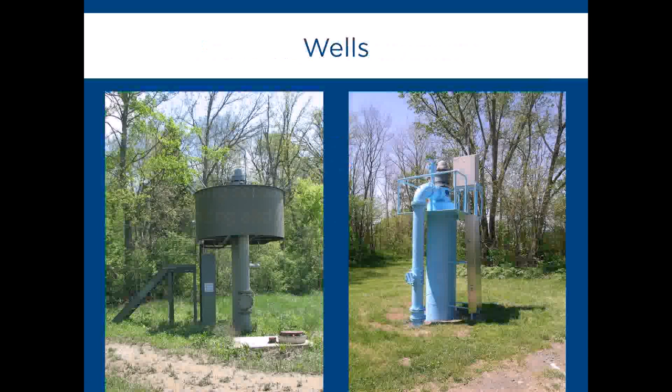The clay layer is important with contamination or spills or any activities that happen on the land surface that could impact the soil. If there's a clay layer of soil between the surface and the aquifer, then that helps act as a barrier. And in those situations, you would have a confined aquifer where it's isolated from the surface. And then there may be other situations where there's an unconfined aquifer where the water is more susceptible to surface contamination.

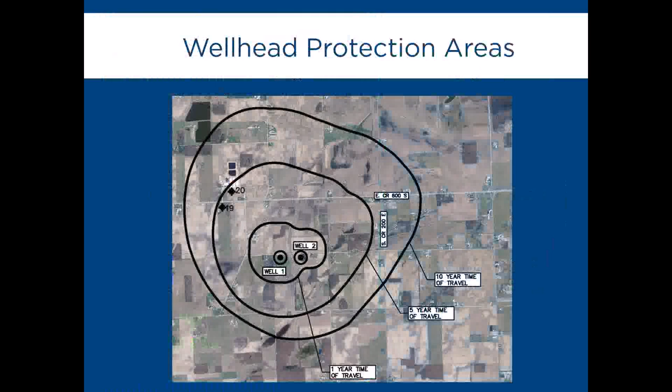So let's talk about the importance of groundwater protection. As I mentioned, the activities that happen on the land surface can impact the ground and then the water and the soil underneath. So if there are impacts to the groundwater or the soil, it can migrate down into your groundwater. So the 1-year, 5-year, and 10-year times of travel are important areas to focus on with your

wellhead protection efforts. The 1-year time of travel represents if a point of contamination lands within that area, it would take 1 year to travel to the wells, and then the same with the 5-year and the 10-year. So your wellhead protection planning is kind of looking at either a 5-year or a 10-year scope as to how you're going to be managing those areas and how quickly contamination might travel to your wells.

Any small amount of contamination can have a big impact on a drinking water source and can make it unsafe. So treatment can also be very difficult once an underground aquifer is contaminated. So it's important to protect the groundwater source so that you don't have to deal with public health issues.

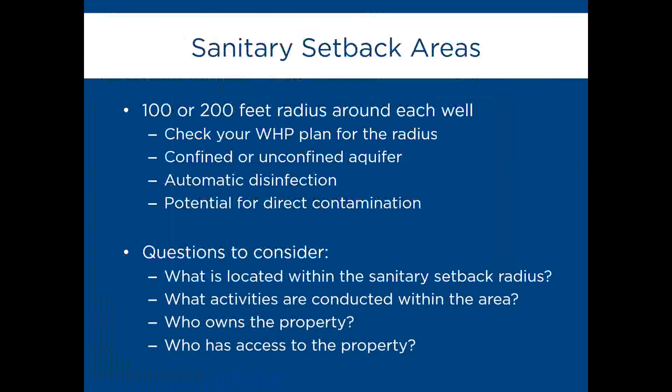Who owns the property? Sometimes wells are placed on properties that are not owned by the utility. And what are the challenges in trying to deal with different property owners? And then who has access to the property? All of your wells need to be secure from unauthorized access. So that's another issue to think about around your wells.

So let's first talk about chemical usage within the setback area. All chemicals need to be restricted. So no chemicals should be used, applied, mixed, stored, or transported within your sanitary setback area. Now you can use the chemicals that are used for water treatment. In many cases you do have water treatment chemicals near your wells.

So that's appropriate. But thinking about some of the other chemicals, are you using chemicals? Are you applying fertilizers or pesticides, doing any kind of mixing, any storage, or the transported could be transferring a chemical from one container to another. All of these kinds of things should not be done within 100 or 200 feet of your wells.

If you do have anyone doing lawn maintenance in the area, make sure that they are educated on the refueling or repair of any of that equipment. If there's a mower or a weed eater that needs refueling, it should be taken outside of the sanitary setback to transfer fuel into those pieces of equipment. Just because of the likelihood of having a spill, you want to kind of eliminate that issue.

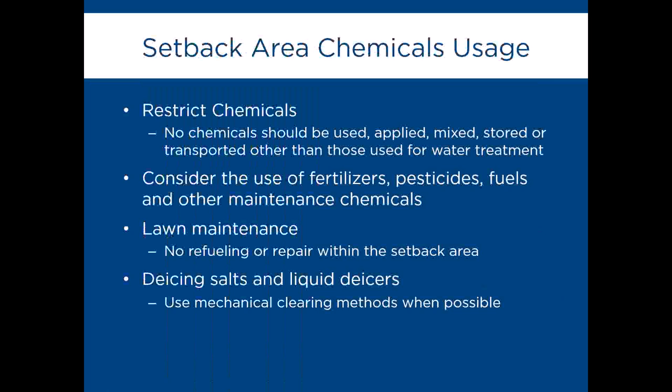And then something else to think about is de-icing. Usually there's an access road to your well, or there may even be some sort of a road next to your well that in the winter you need to do some sort of de-icing with salts or liquid de-icers. If you can use mechanical clearing methods, that is the best option. Obviously, you want to take into consideration the safety issues with ice and try to maybe apply lightly if not at all. But do your best to try to control those types of situations.

So, preventing and cleaning up spills within your sanitary setback. If you're going out to your wells to check on the wells, you're likely taking a utility vehicle, and you want to make sure that those vehicles are not leaking. So check those vehicles periodically, make sure they're not leaking. If you do have a leaking vehicle, don't take it near your wells. Don't park it near your wells.

Any of the equipment that's located near your wells, make sure that that is not leaking. If there are leaks, you should place drip pans under the leaks to catch the spills, or an absorbent spill pad might be useful to help collect those spills. You should always clean up spills with dry methods. So absorbing a spill or using oil dry, the granular absorbent, is a good option. You should never spray a spill with water to try to wash it off.

And if you do have a spill that's puddling, sometimes a boom can be used. They have absorbent booms that can provide a barrier to help control a spill and prevent it from moving. You also never want to allow a spill to soak into the ground, especially in your sanitary setback area. That is the major issue. So if you do have soil impacts, you want to make sure and dig up the soil, and if you have a gravel surface where a spill has occurred, the rock that has been spilled on needs to be removed and taken out, just so that spilled material does not migrate down into the ground.

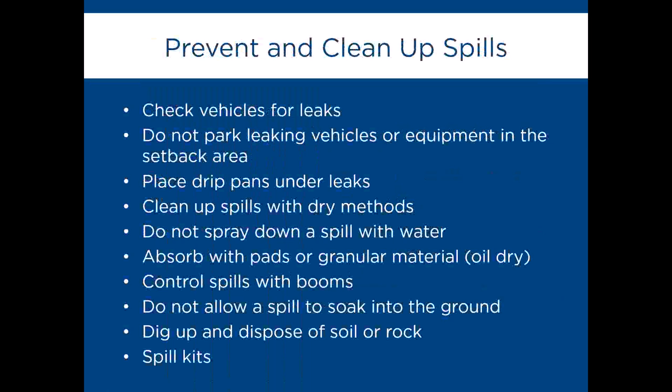One option that you may consider is having a spill kit on hand, maybe in your vehicle, or if you have a well house or some sort of a water treatment plant near your well, some sort of a structure where you can keep a spill kit so that it's on hand to address spills as they happen.

So then let's talk about drainage within your setback area. You should do periodic inspections of your setback areas to look for the drainage patterns. The drainage in your setback area should always flow away from your wells. This is where a spill would flow. So if there is a spill, you want it flowing away from your wells and not towards your wells. A good way to check on this is during a rain event. When it's raining, go out to your wells and take a look at where the water is flowing. And this gives you a good idea of where stormwater might be ponding or where it might be flowing.

You should also check the adjacent properties, the properties that are around the wells, to check for on-flow. So the drainage from another property might be coming towards your wells. And if you can redirect those flows or route them around your wells so that they're not flowing towards, that is the best situation. You should always inspect after a rain event to look where the water is ponding. If there's ponding water, that's not a good situation. You want to try to regrade those areas so that those little pockets of ponding water don't sit, because then they'll eventually soak into the ground.

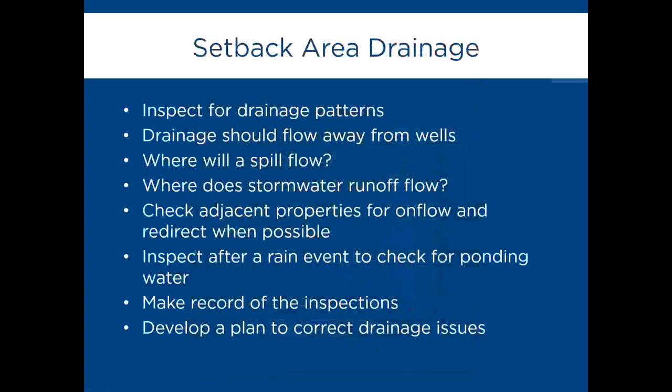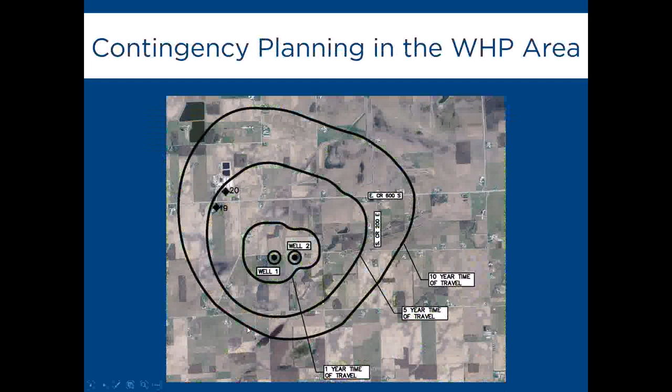So going back to our wellhead protection area, we now want to talk about contingency planning. So in the event that there is a spill or some sort of contamination, what are the steps that we need to take to address those issues? So thinking about this wellhead protection area and what are the steps that we need to take.

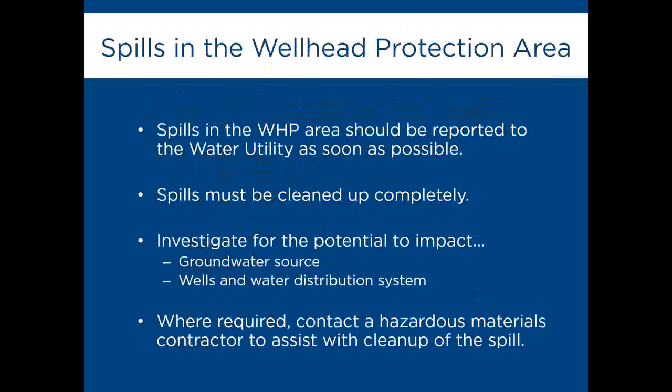So now we're going to talk about those emergency scenarios. And as we go through these, I wanted to just have you think about what it is that you would be doing in the event that you had one of these scenarios. So the first one is a power outage, then a mechanical failure, a distribution system leak or failure, a fire, explosion or a natural disaster, and then a spill. And every situation is a little bit different, so just think about these in general.

So if there was a power outage at your well, if you go to your well and you notice that the power is out, you want to notify your supervisor and then check for an alternate power source, or maybe an emergency generator needs to be turned on. You want to monitor your wells to make sure that they're working properly, and then turn to additional wells.

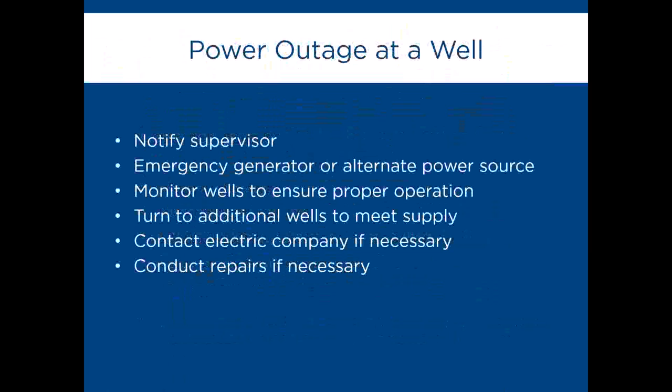If there is a well that cannot be used, is there another well that can be turned on to help meet the supply? The electric company might need to be contacted if it's a situation associated with their utility, and then conduct the repairs if necessary and get your well back in service.

A mechanical failure at your well. So this might be a pump that has gone out. You want to notify your supervisor and then check for leaks and try to control those leaks. Remember the sanitary setback area. You want to clean up those leaks immediately.

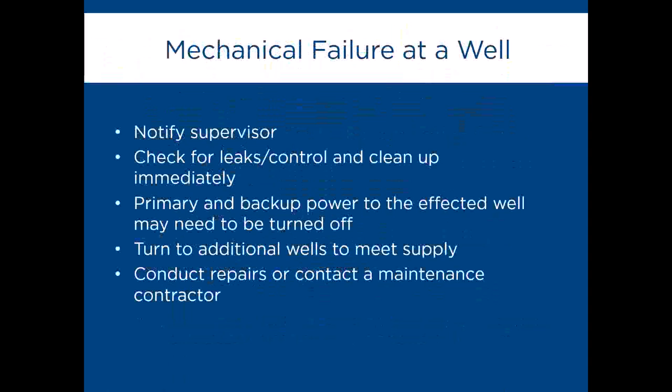So you want to also look for backup power. That may be the reason for the failure. You may need to turn that off, the backup power. You may also need to turn to additional wells if you have a well that's down completely and it needs to be repaired. So conduct your repairs and then contact a maintenance contractor if necessary to help with that.

When you have a leak or a failure in your distribution system, you want to notify your supervisor and then close off appropriate valves to try to isolate the problem. You might turn off an affected well if necessary and then start to conduct your repairs. When you are doing the repair, be aware of spill prevention during that time.

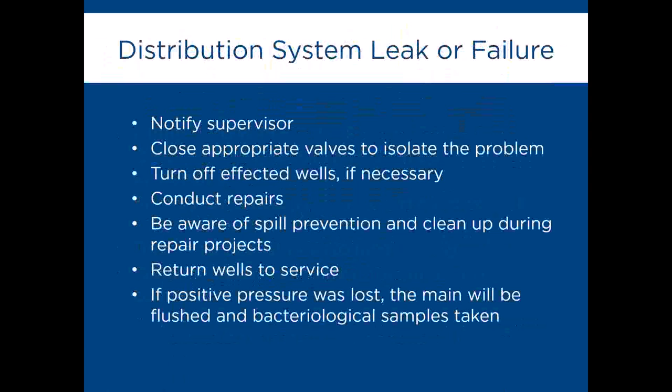If you've brought in equipment to help with a repair, you want to clean up any kind of a spill that happens during that time. And then you want to return your wells to service and get your system going again. If you did lose positive pressure, the main would need to be flushed and bacteriological samples would need to be taken.

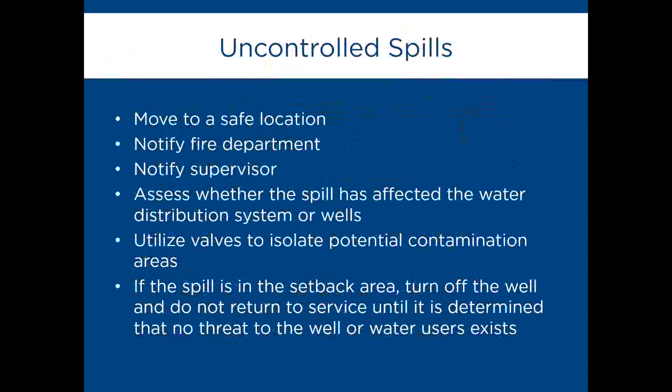And then if the spill is within your setback area, you want to turn off the wells so that the well doesn't start to pump some of that contamination directly into your wells. And do not return the well to service until it's determined that that spill has been completely cleaned up and that the threat to the water system has been eliminated.

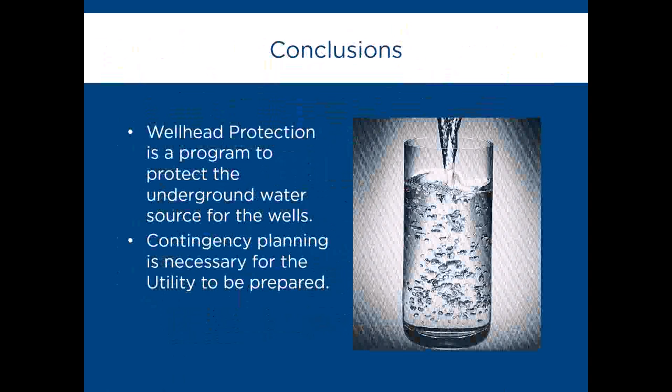So in conclusion, I just wanted to wrap up and talk about the importance of wellhead protection. It's an important plan that you have in place to protect your groundwater source and to keep the area safe. And then the contingency planning is important for the utility to make them aware of what do we do in the event of a spill, and the training exercises like this that go on just to help remind you and help you think about what are the situations so when they happen you can be prepared.